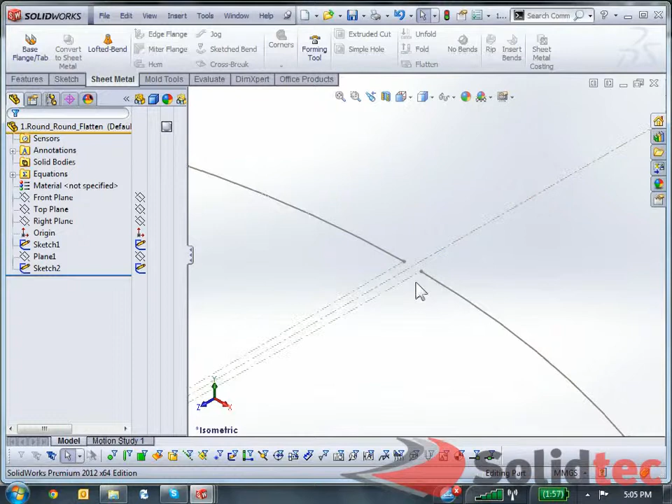Note, in order to flat pattern these sheet metal parts, the circles have to be cut and there needs to be a small gap available. Same for the top circle. Fit it back into my screen, create a lofted bend, select my two profiles, and SolidWorks will create a sheet metal part from there. I can select the thickness, just leave that at 1,

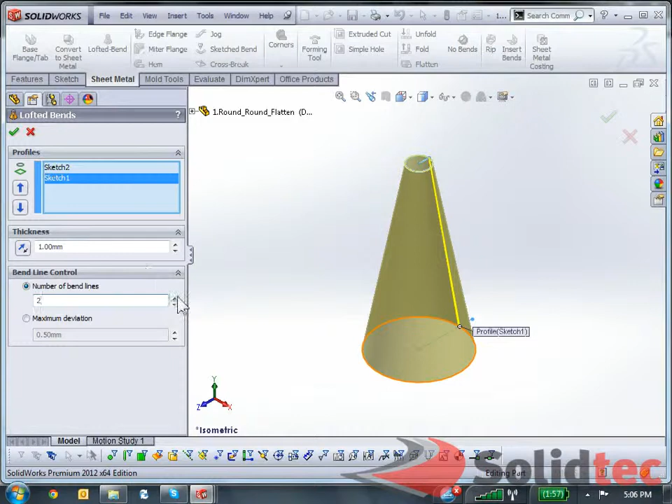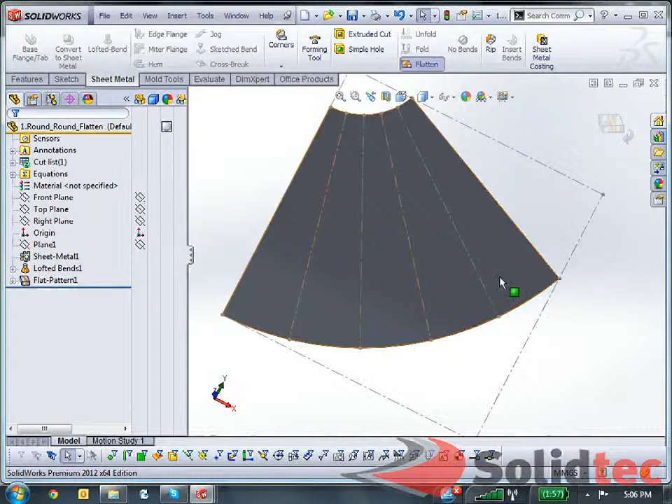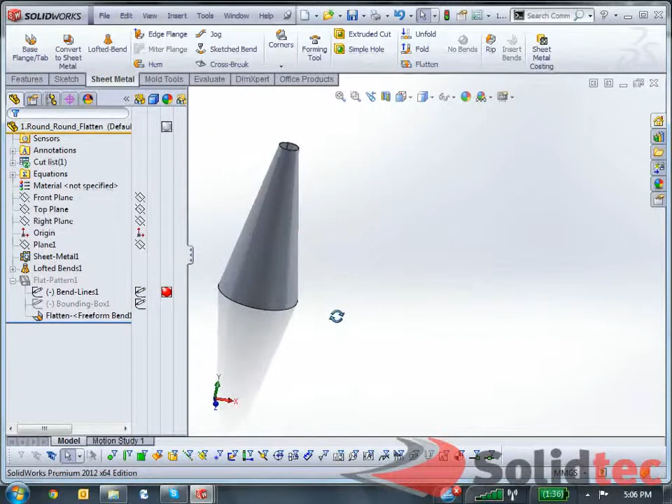You can change the sketch colors if you want, and I can show you the bend lines over here. You can also see the bounding box over here. SolidWorks has the capability of showing you how big the bounding box is. Back to my normal part over here, you can see that these circles are aligned vertically together.

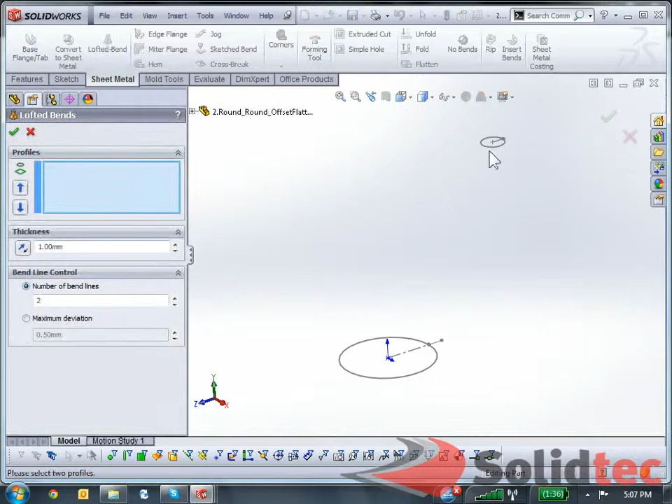They don't have to be, so continuing onwards to my next part, I have the same sketch over here. Again, the circles are split, so there's a small gap between both circles, and they're offset from each other. This is not a problem for SolidWorks at all. I can still select both sketches. SolidWorks is still able to create a lofted bend.

Again, instead of adding the number of bend lines, I'm going to add the maximum deviation, set that to 0.5 mil, and click OK. Now SolidWorks will make sure that the maximum deviation is only 0.5 when I flatten out my part. The maximum deviation is how much the approximate bending, due to the fact that it's a lofted bend, will deviate from the smooth shape.

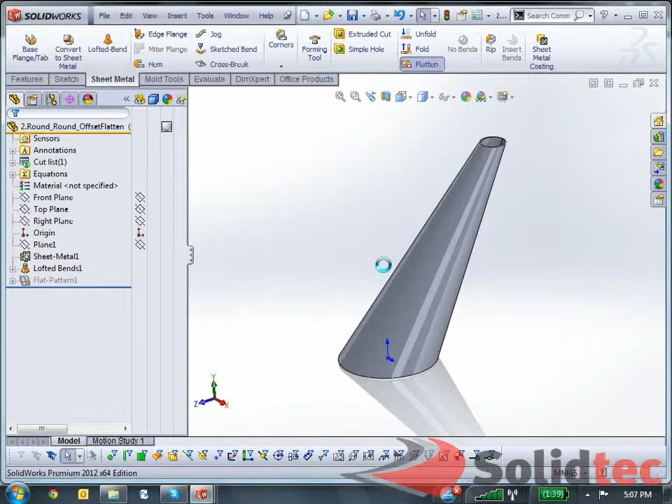What I'm going to do now is just flatten this part out, like so. And we can now see that SolidWorks has no problems at all flattening this part out, and it's created the bend lines for me. What I can do is per bend, just change this color quickly to red, so we can see them. Now there are some more bend lines over here.

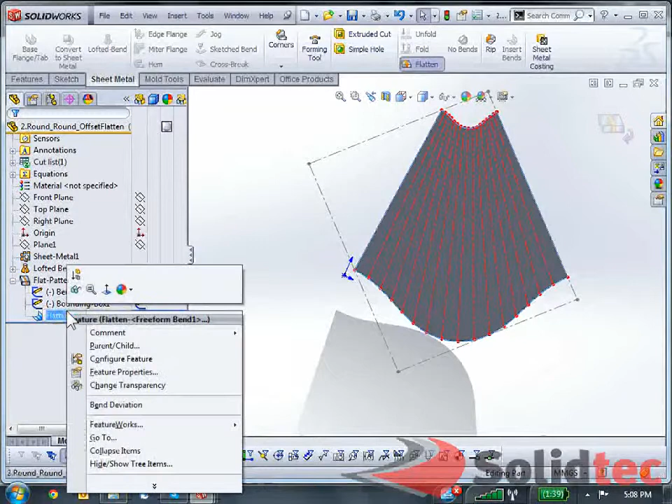What SolidWorks can do is show you the deviation per bend. So if I click bend deviation over here, it can show me all the bends. And I can select maximum deviation only if I want to. It will show me the maximum deviation over here, which is 0.04 of a millimeter. So that's great.

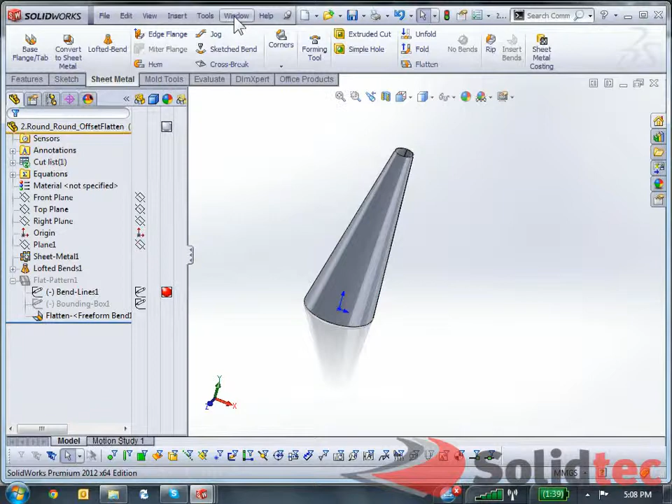Now again, you're also not restricted to only two circular profiles. I've prepared another sketch over here, where we've got a square profile, and we've got a circular profile over here. Again, I'm going to apply a lofted bend to create a transition and a sheet metal part. Just make sure that the sketches are ripped or that there is a small little gap.

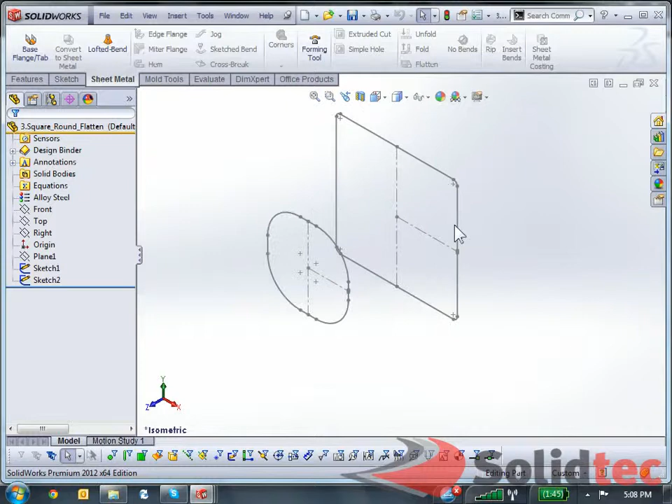You can change this dimension as long as it's a small gap, so it can be 0.1 of a mil. I think in my case I just used 1 millimeter. Create lofted bend, select the profiles, and SolidWorks will create the part for me. Now, I can select the number of bend lines again, bump that up to 6, click OK. And we've got a sheet metal part here with a square to a round.

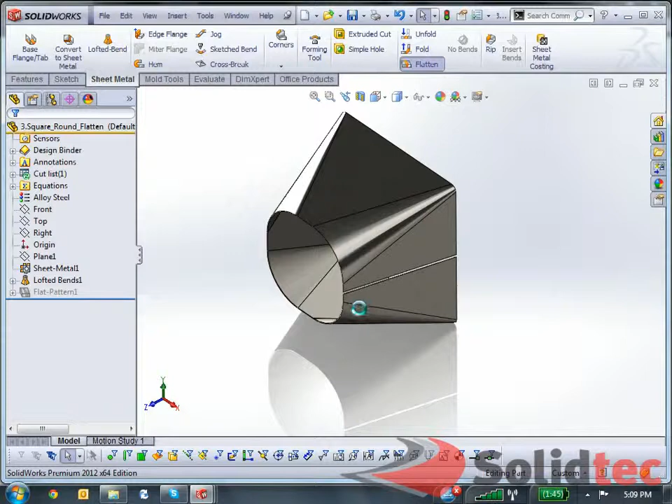Looking at it in its flattened form, SolidWorks is trying to calculate it, and we can see now that we've got our bend lines here as well. Now, if I open up this design journal, there's a little picture up here that actually shows you again what the maximum deviation is. Because we're using a lofted bend, we always have a little deviation over here. So we've got a smooth line over here and the actual line that's created by the bends over there.

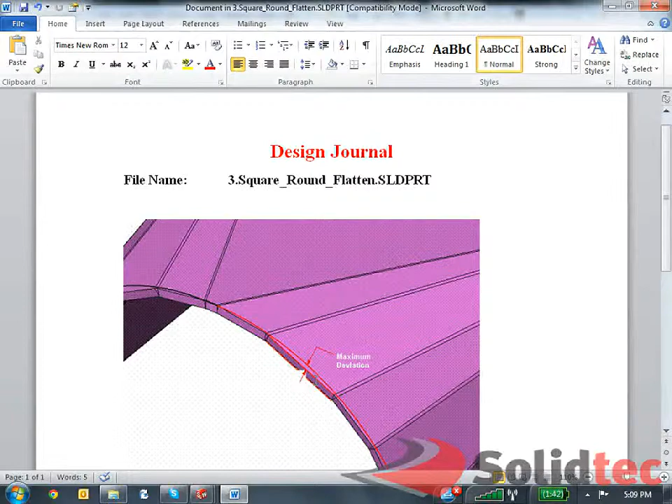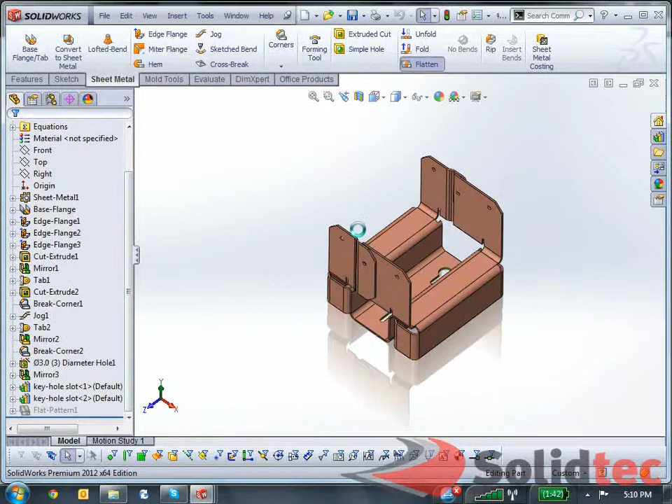Now, closing this off. Again, SolidWorks has no problem flattening this out. My last part that I want to demonstrate for you is a bracket. This is a more realistic part that our customers will actually manufacture. No problems here to flatten this out either. In its flattened form, we've got my bend lines over here as well.

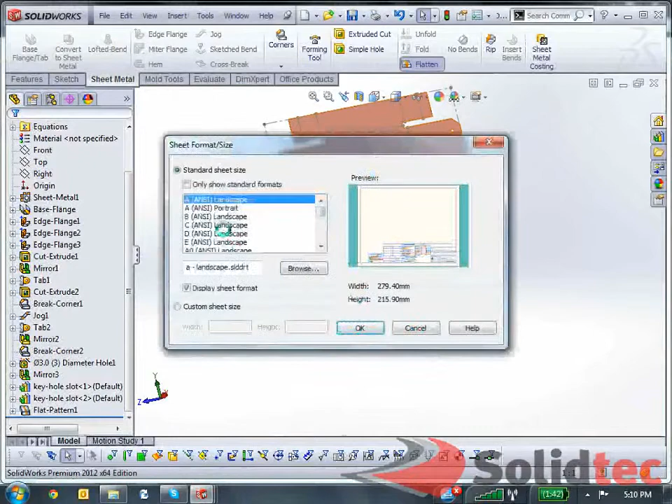What I can do is just save this part now and create a drawing from this part. Put it on a drawing sheet over there. Make it a nice big size. C size should be fine. Alright, add the flat pattern on there. I might change my scale here to 1:1, make things a bit bigger.

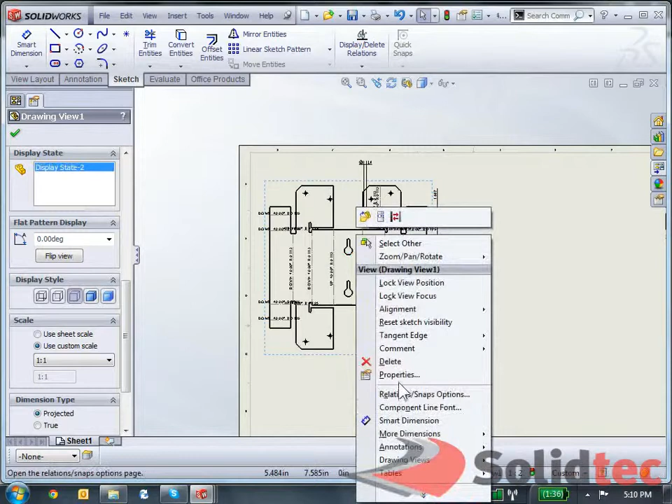And you can see that the notes and bend lines here are already added. I'm just going to hide them for now, going inside my properties and not showing the sheet metal bend notes. I already added some dimensions in there as well, which I don't really need, so I'm just going to move them out. I've got my flat pattern part over here. Note that I still have the option to show the bounding box, which determines the maximum size of the part to actually manufacture it.

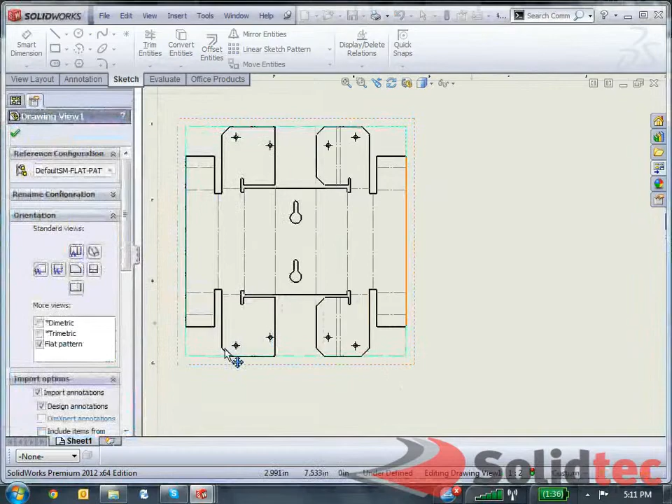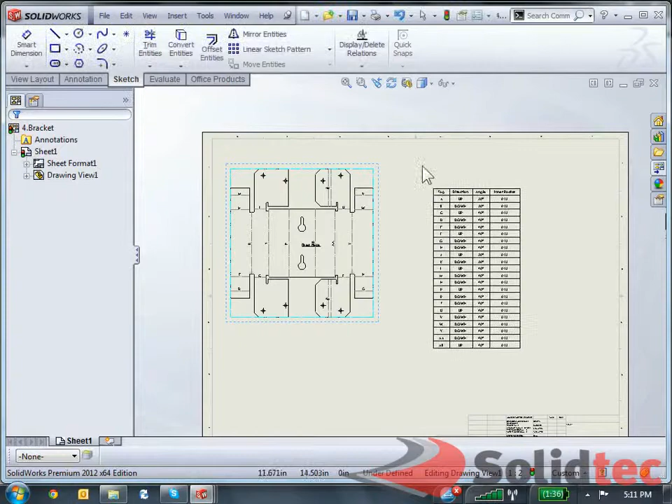Another functionality in SolidWorks is that I can add a bend table over here. So instead of using the bend notes, which is pretty messy, you can also use a bend table. Choose how you want to label your lines, ABC or 1, 2, 3. I'm just going to go for ABC. Click OK. Place my bend table next to that.

You can now see that my bend lines actually have letters next to them, which correspond to the letters in my table. My table shows tag A, up direction, 90-degree angle with an inner radius of 0.13.